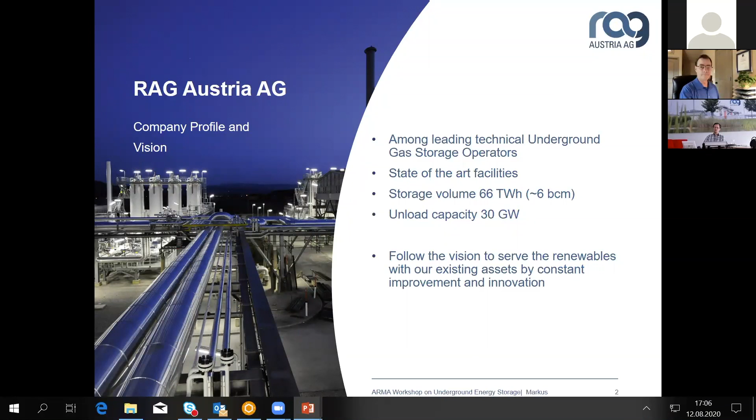So today I want to talk about our underground storage project, but first a bit of advertisement about my company. RAG Austria is among the leading underground gas storage operators in Europe. We have a storage volume of about 66 TWh. We want to use these assets in a renewable energy future. And as an operator, we thought about how we participate in such a renewable energy future. And the logical choice here was gas, and this gas being hydrogen, which is generated by the power-to-gas technology.

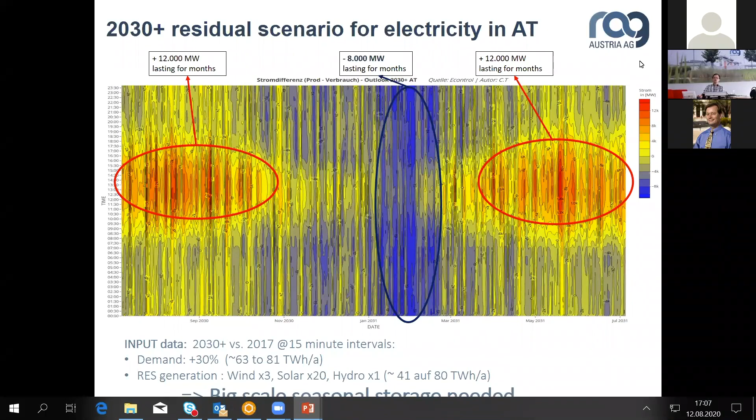But additionally, as we are connected to the European gas grid, okay, sorry, now it's working. The European gas grid is connected to the most promising areas of renewable energy generation within Europe. And in Europe, we're developing a huge hydrogen infrastructure, and all these electrolyzers want to put their hydrogen into the gas pipelines. So at some point, all the storage operators in Europe will need to deal with hydrogen.

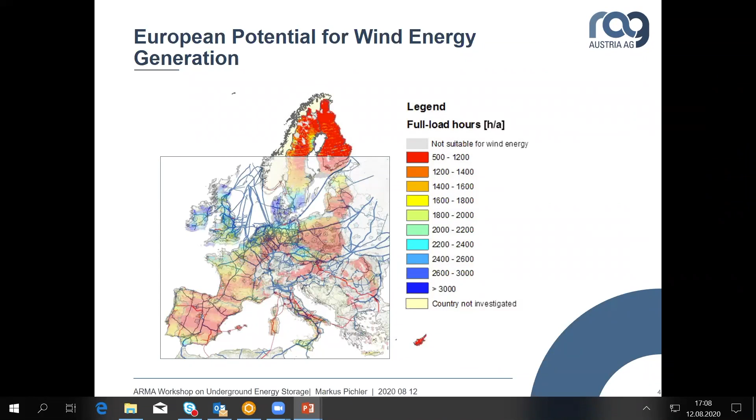I put here the European wind map with the gas network of Europe, and I also have here the European sun map with the same gas grid. So you can see we can't close our storages to hydrogen. We will at some point have to deal with it. And RAG wanted to take the lead in this and said, okay, we're looking now at our reservoirs and how those reservoirs would react to hydrogen getting into them.

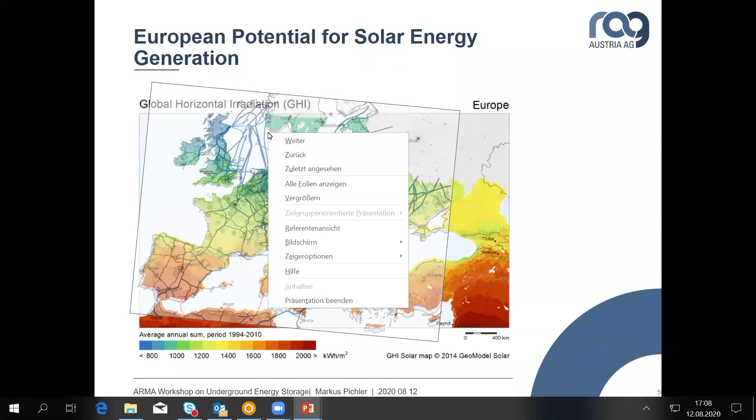So in 2013, we assembled a high-quality consortium of academia and energy companies to answer exactly the question of what would happen if we injected a mixture of 90% natural gas and 10% hydrogen into our reservoirs. But we didn't want to just answer this question on lab scale, we wanted to test it on a pilot scale, which is why we developed one of our reservoirs, a very small reservoir, into an actual test bed facility to get a feeling for what really happens in the field if we inject hydrogen.

So I just want to shortly introduce our reservoir. It's a very small reservoir, as I said. It's very isolated. There are a lot of offset wells around the reservoir which do not penetrate the same horizon. You can see from the volume alone, just about 6 million cubic meters of gas initially in place, that it is really, really small. So it was only found by chance, not really drilled upon.

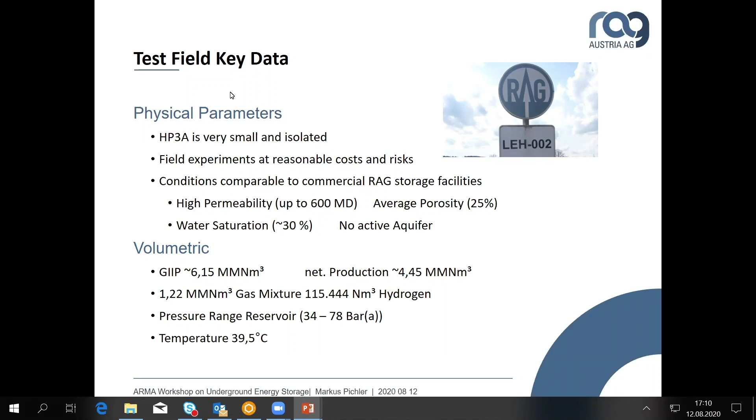Sorry. So just to give you an idea where we are stratigraphically, I just let that stand here. As you can see, it's a secluded reservoir. There is nothing around there, nothing below that.

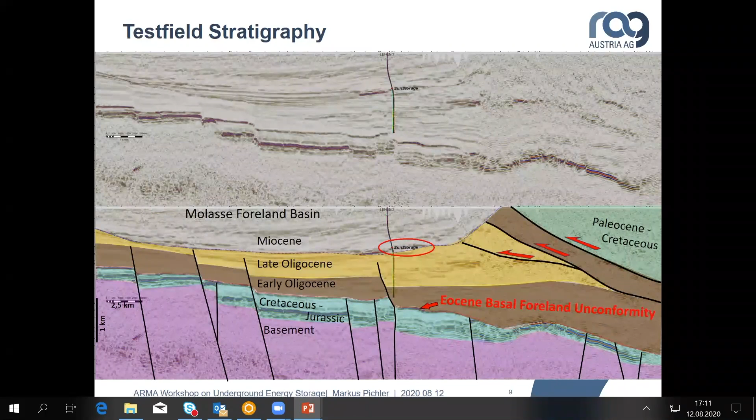Someone still has his device on. Richard, can you mute them remotely? I will see what I can do. Okay, I'll go ahead then.

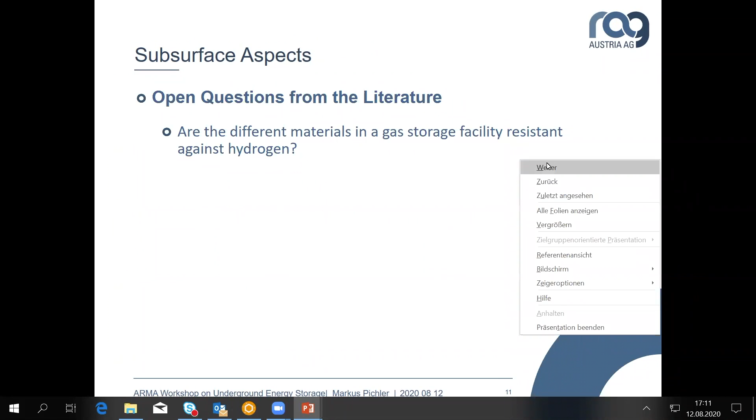And this was very important for us, to have a really secluded reservoir in order to do whatever we want there without risking any other facilities, without risking anything at the surface. So what we wanted to do on a technical point was to answer the most relevant questions from the literature, being: do the different materials of the gas storage facility have a problem with hydrogen? Because, as you can see, we didn't want to build a new facility for hydrogen. We wanted to use our in situ facilities that we have there. And so we wanted to make sure that they can deal with hydrogen without any major modifications.

The next thing, naturally, is the tightness of the subsurface. Would hydrogen escape through the caprock, through the completion? The next thing was, how does the gas mixture move in the subsurface? This was especially important because the molecules of hydrogen and CH4 have a different size, so you could end up with some dispersion flow where the hydrogen moves faster than the CH4 through the reservoir, which in the end would mean that you would reproduce a non-uniform gas mixture, which is not very nice for the end customers, who want to have a uniform mixture.

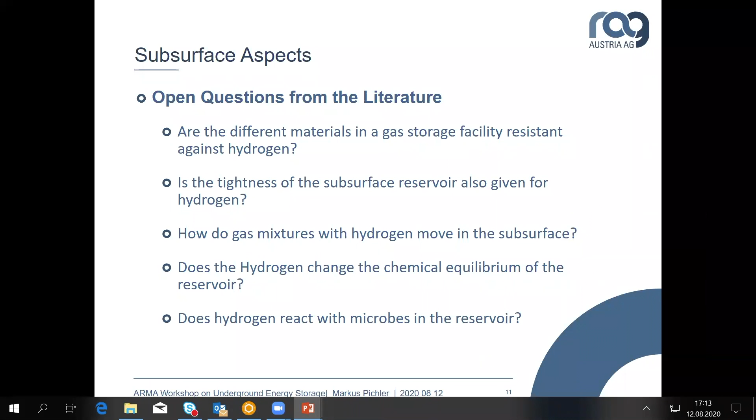Finally, does hydrogen change the chemical equilibrium as well as the biological equilibrium in the reservoir? So are there any reactions in the subsurface that would be harmful for the facility or that would lead to a major loss of hydrogen? Starting with materials, we tested the metals, the elastomers, as well as the cements that we use outside in our facilities in the laboratory for their resistivity against hydrogen-induced changes. We found that the steel grades, as well as the cements we use outside, did not change during the lab experiments. So we put them under strain stress tests with a partial pressure of hydrogen up to 150 bars. The cements were submerged in reservoir water and then exposed to hydrogen for almost a year.

There were minor changes, as you can see in the picture. A reaction seam developed where the vaterite of the cement changed to calcite, which is, however, something that happens due to the reservoir water. So we also did the same test with blind samples without hydrogen, and the changes happened with and without hydrogen. And finally, we had a look at the elastomers. However, we didn't test the elastomers in the lab yet; that will be done in a follow-up project. We just tested them outside.

You can see a picture of our test pipe where we submerged cement samples, steel samples, as well as elastomer samples within the wet gas stream throughout the whole project, and then measured the changes of those samples at the end of the project. And we found that the same changes that happened in the laboratory, speaking of none, also happened outside. There were minor increases in mass and volume with the elastomers, but they were within gas industry standards. So if you would inject just CH4, you'd see the same changes in the elastomers. And to mention it, we are already running a follow-up project. We do a closer investigation of these elastomers to really be sure that no hydrogen-induced changes happen.

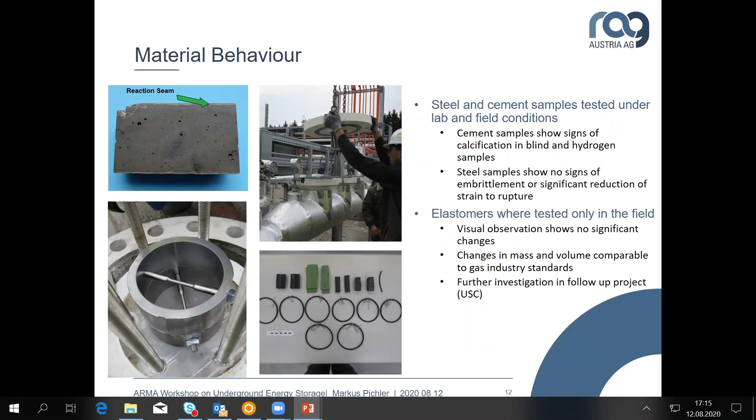I'll head further into the reservoir, and I already said that we tested cement, steel grades as well as elastomers. The completion you can see here was taken out after the field test was finished and sent back to the manufacturer, and they told us after testing it that it looked like new. So no changes happened at all to the completion which was used during the test. We also ran a CBL and the USIT before and after the testing in order to get an idea whether corrosion would happen or whether the hydrogen would migrate through the cement behind the pipes, and both came back very positive. So we saw no corrosion, no changes in the casing, and no micro annulus in the cement behind the pipe.

But speaking of reservoir integrity, there are not only the wells but also the cap rock. For our reservoirs, the cap rock is just a clay rock, so no salt, no anhydrites or something, but just clay. And we tested the permeability of the clay for methane and for hydrogen. You can see this in the table below. And you can see that the permeability for hydrogen and methane is in the same order of magnitude. So we decided that if the cap rock was able to keep methane, it would also be able to keep hydrogen.

Therefore, as permeability was the same, we had to think about diffusion through the cap rock, and there is a lot of literature about hydrogen diffusion through porous media. And you can see, I wrote it at the top, that hydrogen diffusion in water-saturated porous media is just very, very low and not relevant if we're speaking about gas storage, because I won't keep the gas down there forever. It's just down there for about a year. So therefore we said, okay, for us, the diffusion through the cap rock is not an issue, because our cap rock is 100% water saturated, and therefore we concluded it's not an issue.

However, diffusion could also lead to the demixing of the gas, which also would end up giving us a non-uniform gas mixture coming out of the reservoir. And so we tested whether or not the gas mixture would change due to gravitational forces. So we put a gas mixture of CH4 and H2 into a steel pipe 7 meters long, filled with sand, and let it stand for 1 year, and took regular samples at the top and at the bottom. You see this in the left upper corner, to investigate whether or not there would be some gravimetric demixing. And you can see there isn't. So we were pretty sure that in the reservoir there wouldn't happen any kind of demixing, because diffusion forces apparently are stronger than gravitational forces.

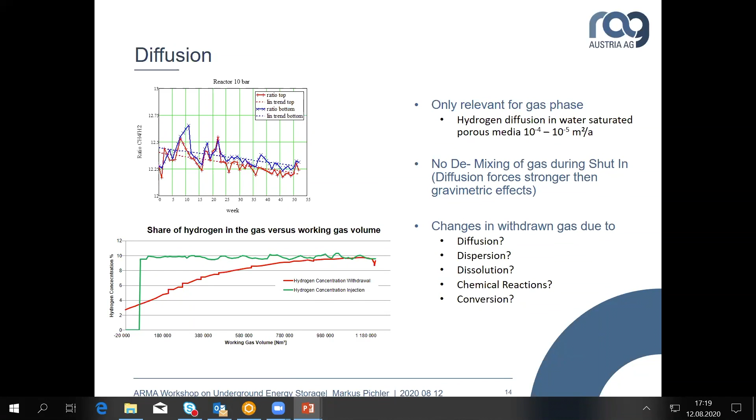However, as you can see from the graph in the left lower corner, when we produced the hydrogen, the mixture wasn't uniform anymore. So the injection was with 10% of hydrogen. The production was slightly increasing. And so we asked the question, okay, what happened to the hydrogen? We could reproduce 82% of the injected hydrogen. And the first thing we said, okay, so some of the hydrogen must have diffused into the cushion gas. So there was still some natural gas inside the reservoir. But this couldn't be the whole story. So we thought about what else could have happened to the hydrogen, and came up with dispersion, dissolution, chemical reactions, as well as conversion. I'll just stick to diffusion for a moment.

After we finished the field test in 2017, 1.5 years later, we took another gas sample in the same reservoir, and it still contained 1% of hydrogen. So this made us sure that the cap rock is tight against hydrogen migration, and as well that there are no sudden chemical or biological reactions that would have in any way reduced the hydrogen or expunged it totally. So we were pretty sure that the reservoir was tight, and that the hydrogen didn't react with anything in the reservoir.

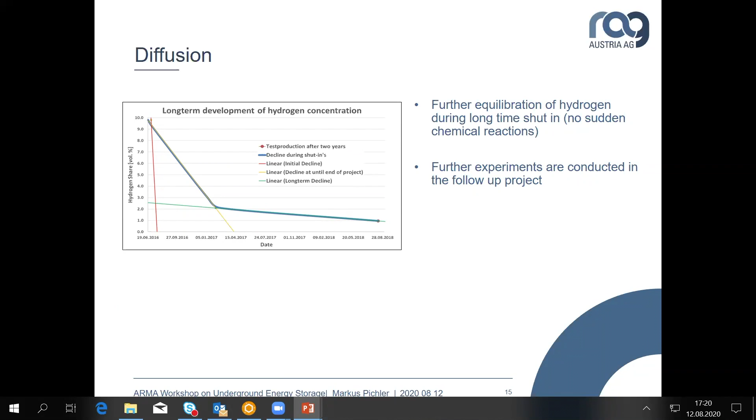But we did further testing, first for dispersion, because as I told you at the beginning, there is literature saying that hydrogen and natural gas move at different speeds through the reservoir. We took again our 7 meters long sand-filled pipes and sent hydrogen and CH4 through it to measure breakthrough times. In a dry environment, the breakthrough times were different. So the hydrogen was always slightly faster than the methane. However, when we then later water saturated the sand pipes, this effect cancelled out. And so we concluded that at least over short distances, methane and hydrogen are traveling with the same speed throughout the reservoir. So we ruled out hydrogen doing some kind of viscous fingering and therefore getting this slope.

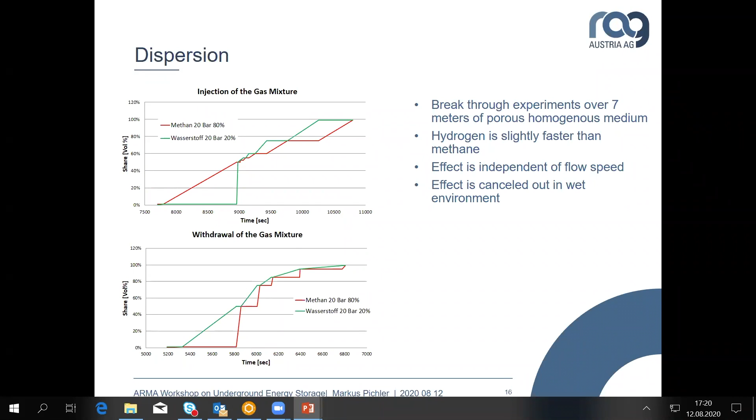So this is one of the major findings we had from the Sun Storage reservoir, to say, okay, we have to look at this more closely, and we also have to look at kinetics in order to know how much does dissolve and how much does stay in the water, because this number has to be known before making a commercial hydrogen project. And we're investigating this as we're speaking in our follow-up project.

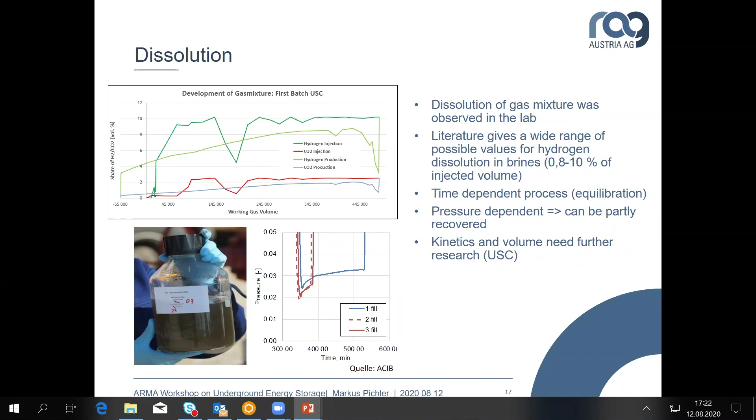And then again, we came to reservoir changes. So hydrogen is very reactive at the surface. We know that it happily reacts with oxygen. And there were also some thoughts about what could happen in the reservoir and with which materials the hydrogen could possibly react in the reservoir.

Therefore, we again started with lab tests where we took cores from similar formations and again submerged them into reservoir water and then exposed them to 25 and 75 volume% of hydrogen up to a pressure of 120 bars, and kept those samples in the reactors at reservoir temperature and reservoir pressure for 2, 3, 6, 9, and 12 months and measured the changes.

Even at thin section level, we couldn't find any changes. So the permeability did change, but also in the blind samples. And after some investigation, we found that the error we made was that we used very old cores that were dried out, and exposing those dried cores again to water led to clay swelling, which then in the end changed the permeability. We also investigated the permeability of our reservoir with doing well tests on a regular basis.

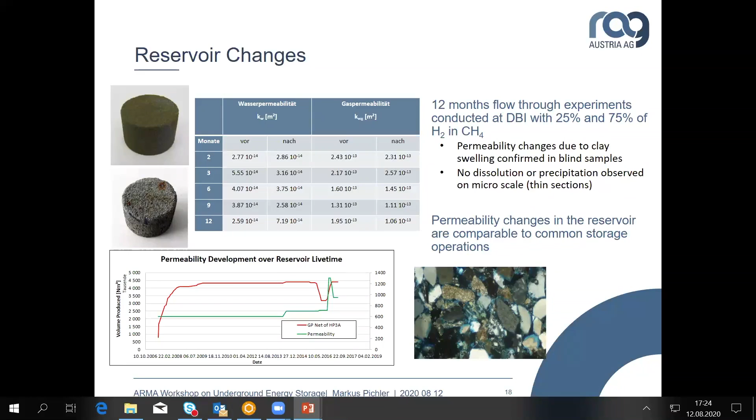And last but not least, there is the conversion. So most of you might know that a lot of the gas we are producing worldwide is not of thermogenic but of biogenic origin. And the microbes which have generated this gas are still in the subsurface. They're still in the source rock, they are still in some of the sand layers, and obviously they were still inside our test reservoir. And when we injected the gas mixture, we also had some amounts of CO2 within the natural gas. And as you can see at the end of the field test, the CO2 was almost gone.

And we found that this conversion must have been of biological origin, because if it had been of chemical origin, then we would have seen some changes in temperature, and I therefore plotted the temperature here. You can see there is some minor change in temperature, but this is just because you're injecting cold gas and withdrawing warm gas. And therefore we deduced, and I'll give you a second slide in a second, that the effect that we have seen here must be of biological origin.

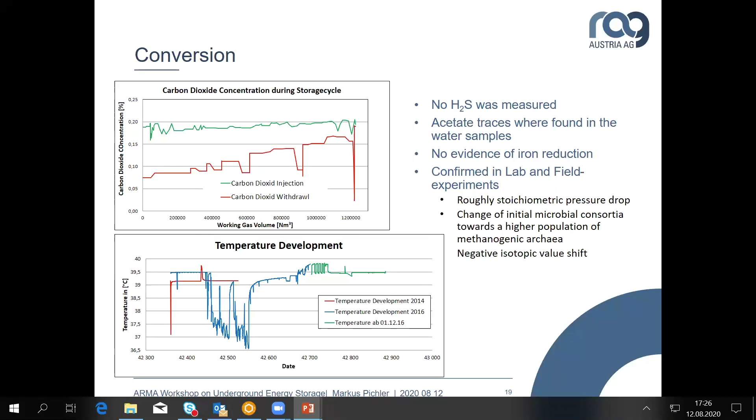Positive for us was that these were the only reactions we saw with hydrogen, so we didn't encounter any H2S, although we have sulfur sources within the reservoir, being SO4 in the reservoir brine as well as pyrite in the rocks. We also didn't find any evidence of iron reduction. We found small traces of acetate, but they are natural to the reservoir. So therefore we concluded that this can only be an effect of the microbes that can convert hydrogen and CO2 to CH4. We then tested this in the lab, and what you can see on the next slide is exactly the outcome of this test.

So on the leftmost side, you see the microbial consortium at the beginning of the test, and I want you to focus on the pinkish column. So at the beginning, there were almost no archaea within the consortium. And after we finished the tests, the archaea made up the majority of the microbial consortium, which we concluded was due to the fact that we fed them, and we fed them for a long time. The reservoir was shut in for almost 4 months.

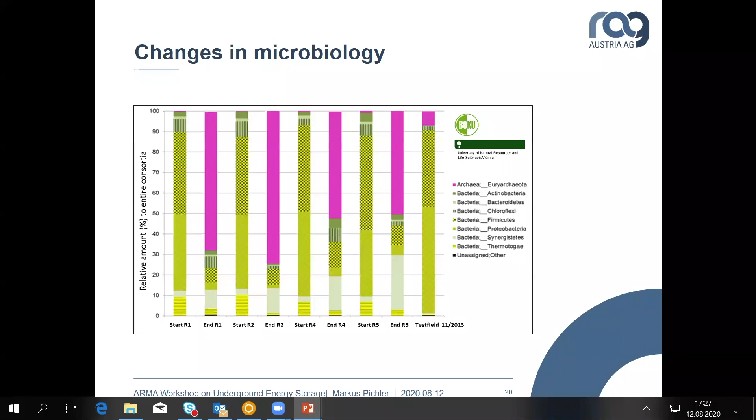And afterwards, the microbes had consumed all the CO2. And when the CO2 was consumed, they got back to a dormant state and didn't consume any more hydrogen, but they grew dramatically. This is also something we would have to look at in our follow-up project, because if they grow further, they might even plug our pores.

And finally, we also had a look at economics and legal analysis. I won't go too much into detail here. If you have questions here, I'm happy to take them with me. But as I'm a technical advisor in this project, and economics and legal are not my strengths, I would forward those questions, if you have some, to the guys who really have an idea about that.

So summing up, underground sun storage was a success. We could prove that 10% of hydrogen could be stored within our facilities, within our reservoirs, without changing anything and without any harm done to the facility or the reservoir.

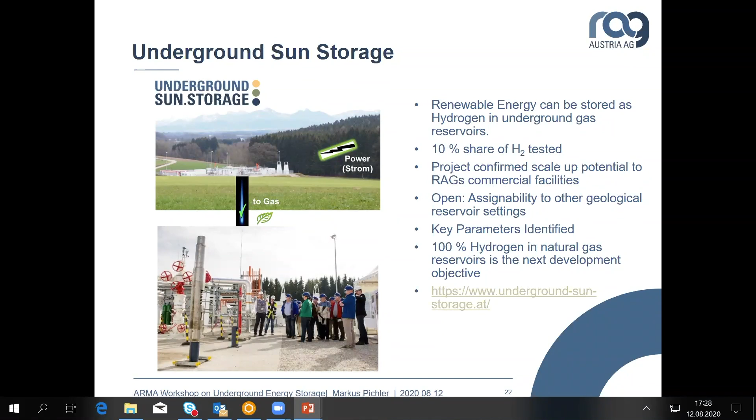And we think that we identified a key parameter for a renewable energy future, where you could really store huge amounts of renewable energy in a safe way and provide it to customers and to the industry if needed. I'll just have 3 more slides about our follow-up project, and I just want to go through them very quickly, because there were a lot of open questions. I mentioned them throughout my presentation, and we wanted to answer them, such as the diffusion.

We wanted to know, does the diffusion have a further effect in the reservoir? Dissolution, I talked about that, we're already investigating it. Microbial activity, we're also investigating it. Modeling was also something we found out. There is, at least to our knowledge, no commercial software developed yet that can readily simulate the behavior of hydrogen in the reservoir. Then there were the rubber seals and the elastomers.

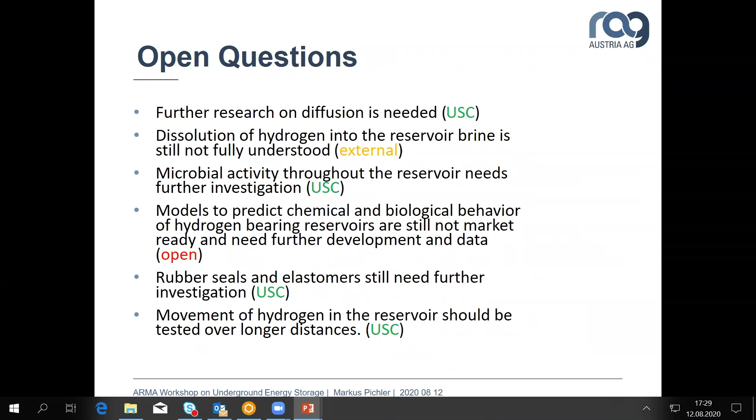We're also looking at them in the follow-up project. And the movement of hydrogen is not yet clear for us. Even if what we saw is true, we still want to know more. And we also do this in our follow-up project. And speaking of which, this follow-up project is called Underground Sun Conversion, where we want to utilize the conversion effect that we saw. So we want to know if the microbes are able to convert hydrogen and CO2 on an

industrial scale, because if we could make this work, then we would convert our one-way industry into a sustainable carbon cycle industry, where we could keep our facilities as they are, as we would just keep producing CH4, no changes for the end customers, no changes for the industry, but still doing it with renewable gas without having to build huge methanation facilities on the surface.

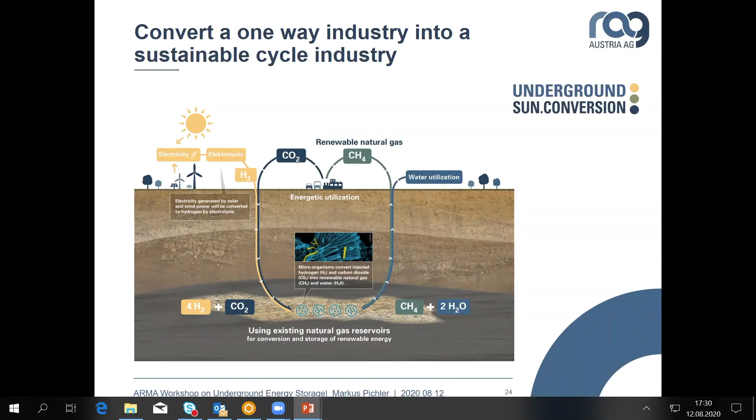This project started in 2018. We're already doing the third batch, where we inject hydrogen and CO2 and reproduce it after a certain shut-in period. I'm sorry that I can't present any graphs to you yet, as this is ongoing work, but there will be a final report in mid-2021. And everyone who gives me a hands up will get the report then, and I will tell you where to get it.

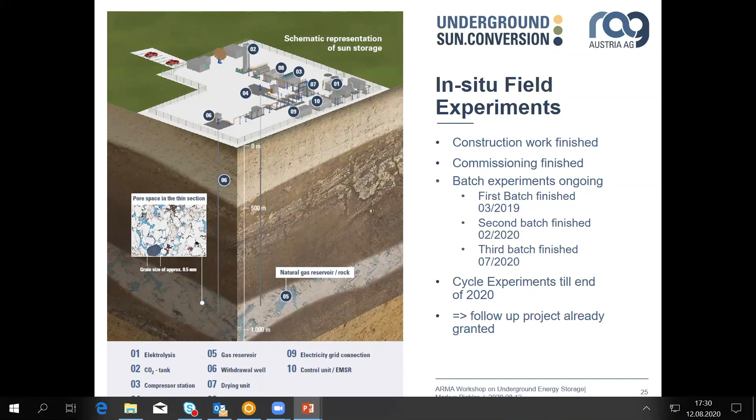Yeah, just a quick note. So the idea of this project is really to push further the idea of how much can these microbes convert, how much volume can they convert, up to which mixture could we inject hydrogen and CO2 without getting any harmful effects within the reservoir. And as well as how does the biomass in the reservoir react? Do we get clogging? Do we get any other issues? Do we get any other reactions due to other microbes being activated? So that's the idea of the second follow-up project, where we are now fully engaged.

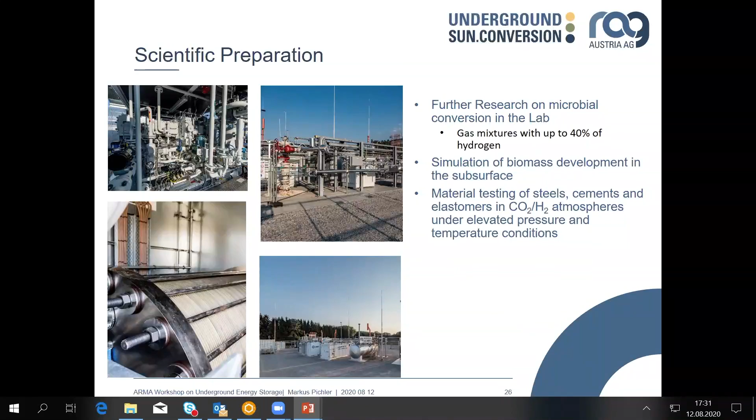And as a conclusion to all of this, I want to say that the state-of-the-art underground gas storage facilities, in our opinion, will be an essential part of not only the Austrian energy security, but the worldwide energy security. The renewables need gas storage, they need energy storage due to their fluctuating nature. And we think that with our Sun Storage and Sun Conversion project, we have really laid a very, very good foundation to emphasize that we could use the renewables not only as electricity, but to make up a whole new part for the renewables in injecting them into the gas grid and using them as gas for the right application.

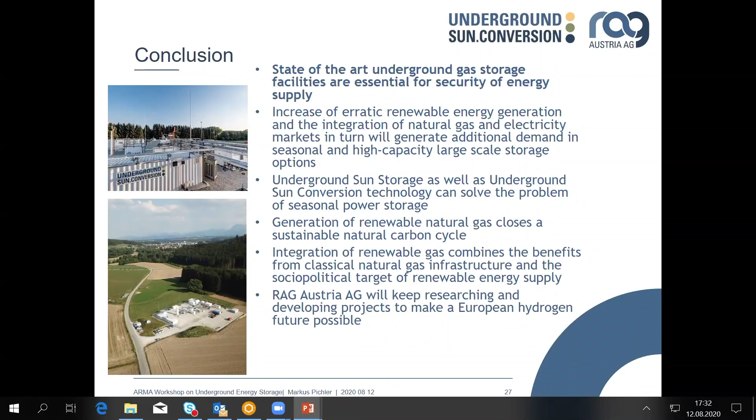Is there microseismicity associated with the underground storage, or are injection pressures low enough to not be of concern? Well, thank you for this question. Actually, there is no issue. So the region we have our gas storages in is called the Molasse Basin. It's in Upper Austria, and it's absolutely non-active seismically. And we're only injecting up to initial pressures, so pressures that the overburden has already seen. So we didn't measure any events or any faults being reactivated.

Oh, the hydrogen, we produced it via electrolyzer. Thank you for this question. We had an electrolyzer unit on the facility and produced the hydrogen from that. So the next question, thank you for that one. What is the energy conversion efficiency in the system? In other words, what is the energy recovery rate?

Well, that's a tough one to answer because we think we're still in a dynamic environment, and the equilibration of hydrogen in the reservoir has not yet fully happened. As I told you, 82% of the hydrogen could be reproduced, and that's where we're standing at the moment. So there will definitely be some losses within the reservoir due to the nature of equilibration. You just need to have an equilibrium in the reservoir of all the components before you can inject and produce the same mixture at any time.